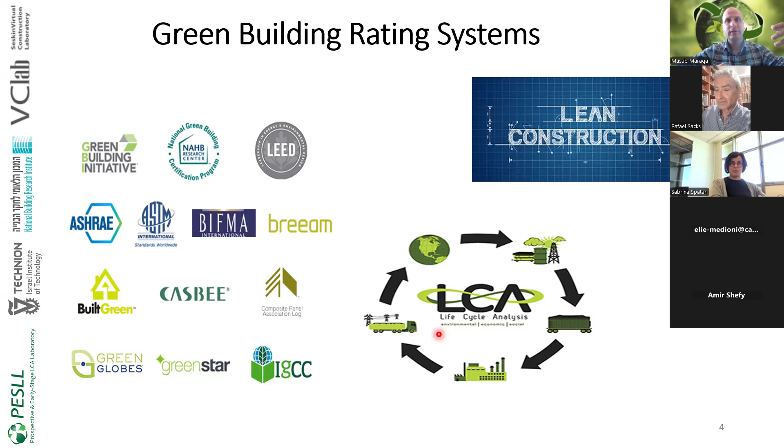For example, lean construction, which is defined as a way to design the production system to minimize waste of material, time, and effort, and maximize value, contributes to reducing different types of waste, but is not considered in improving the environmental performance of buildings.

So what is waste in construction? Waste is one of the central concepts that lean aims to eliminate. It represents any exhaustion of time, money, and resources that does not bring direct value to the customer.

Koskela defined or categorized three types of waste: waste related to transformation, or physical/material waste; waste related to flow, which is time loss; and waste related to value, which is value loss.

Material waste or material loss could be material waste, non-optimal use of material, or non-optimal use of machinery, energy, or labor, while time loss could occur in two things: in the product flow or in the work flow.

In the work flow, like unnecessary movement of people, unnecessary work, inefficient work, and waiting. While in the product flow, it could be space not being worked in, material not being processed, or unnecessary transportation of material.

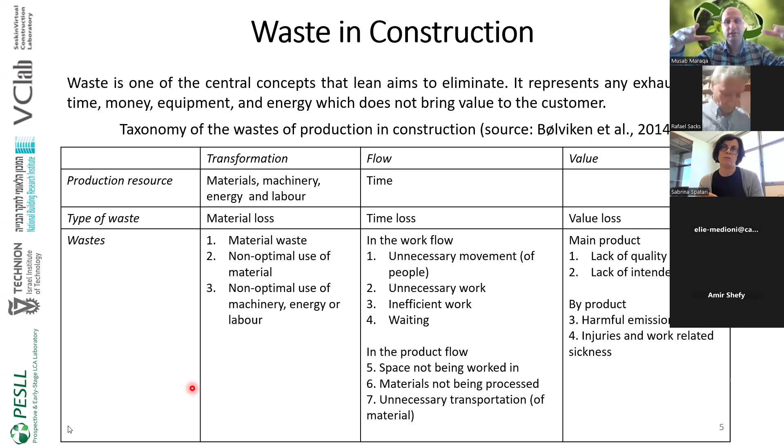Value waste can take two forms: in the main product and in the byproduct. In the main product, lack of quality or lack of intended use; while in the byproduct, harmful emissions, injuries, and work-related sickness.

In construction industry, production can be understood in three complementary ways: transformation performed by workers, equipment, tools; flow, which includes product flow and process flow; and value, which is the customer's ultimate goal. In the current state of construction industry, construction is associated with numerous types of waste.

Some of these wastes are tangible and visible, like material wastes delivered to the landfill. However, there are many hidden wastes represented by process waste and their associated operational waste.

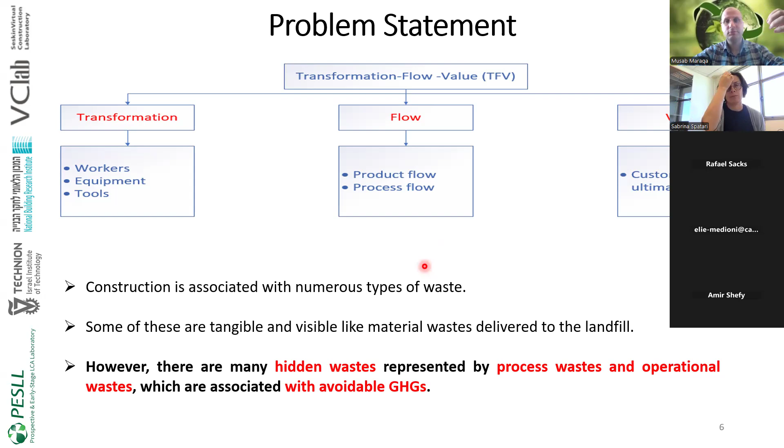Green building rating systems focus on improving the environmental performance of buildings, ideally on a life cycle basis relative to conventional buildings. They focus on materials used in construction, methods of planning, methods of recycling water, building efficiency in lighting, insulation, and acoustic performance. However, the approach is tailored to meeting end product requirements.

While these requirements are influenced by many construction processes and their associated operations, improving construction process can improve environmental performance since it will reduce the impact in both the final product and the whole supply chain process.

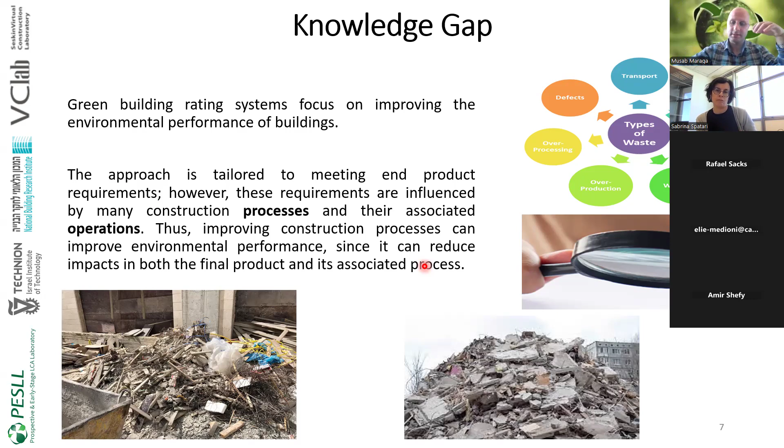So if we look at this figure, this is a flow line chart I created from real data from a construction project. The Y-axis represents the floors, while the X-axis represents the project duration. Those lines represent the different trades or work in the construction site, like the main structural system, the partitions, electrical.

So if one of us looks at this figure and needs to highlight the environmental impact for the construction industry, generally we look at the embodied greenhouse gas emissions in the material, like concrete, tile, or blocks, or embodied greenhouse gas emissions in the material waste resulted from the different activities.

While we generally don't look at the space waiting, for example after one contractor finished the work in a specific location and the successor starts. Or we don't look at the operational waiting, like after a subcontractor finished working in a specific location and waits until starting the next location. While these types of waiting, which is defined as waste, has its own embodied greenhouse gas emissions, which is ignored in the current state.

Musab, what is the unit of analysis on the x-axis? It's days. Yeah, okay.

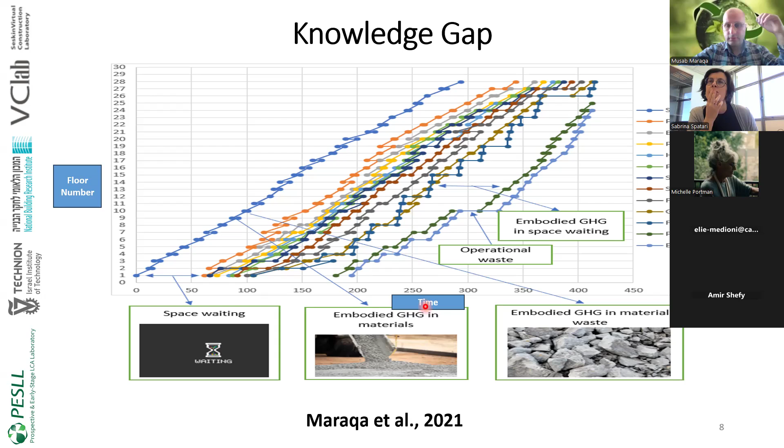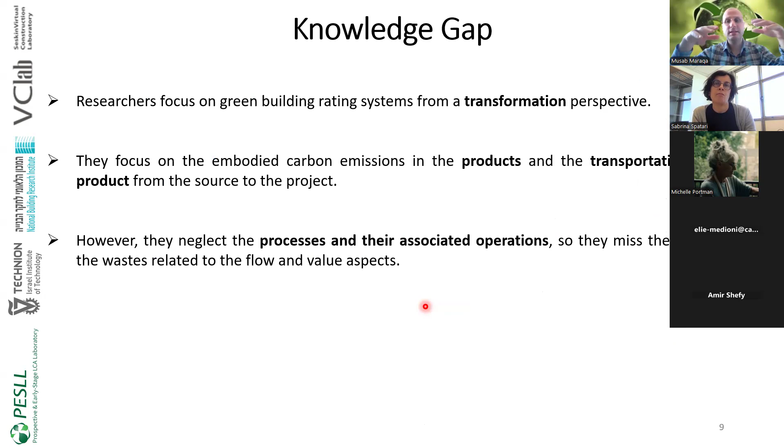So researchers focus on green building rating systems from a transformational perspective. They focus on the embodied carbon emissions in the product and the transportation of the product from the source to the project. However, they neglect the process and their associated operations, so they miss the impacts of wastes related to the flow and value aspects.

So this research generates many questions. The first one: are the current green building rating systems adequate? In what way are the current green building rating systems inadequate in terms of reducing environmental impact? What is the effect of applying a transformation view approach alone to achieve green buildings while ignoring flow and value views? What are the differences in emissions resulting from different flows in alternative operations?

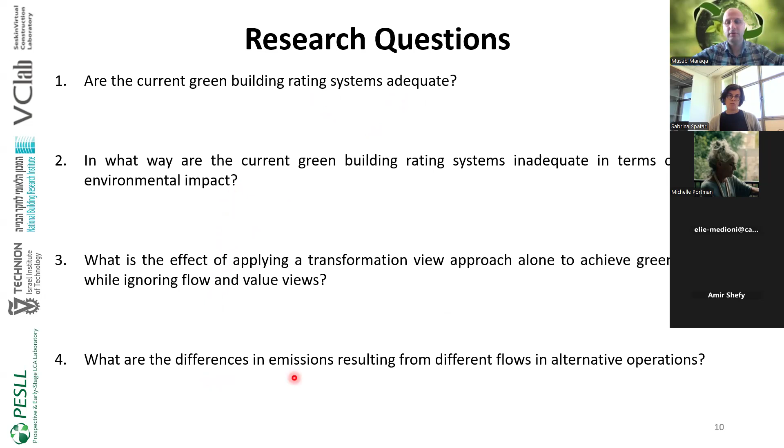What is the effect of project overrun or the effect of project duration from an environmental point of view? What are the best ways to overcome the gaps in the current green building rating systems and include the flow and value perspectives? What data are needed to complete a comprehensive environmental evaluation for the construction process, and how can we collect the required data?

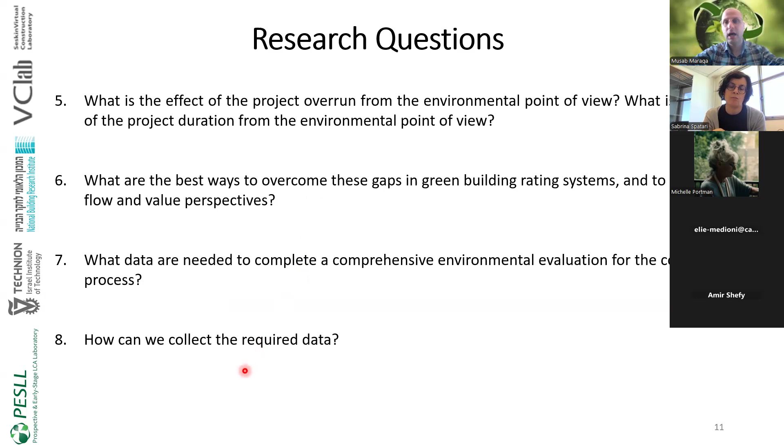So this research aims to explore the effects of the construction industry on reducing and improving greenhouse gas emissions during the construction phase, to develop a framework that measures embodied greenhouse gas emissions stemming from construction activity based on the transformation flow and value theory.

Introduce knowledge about the process effects of lean construction to optimize green buildings. Develop a method to measure the environmental effects of different construction production systems, and identify the effect of different management approaches in reducing product and process waste and improving the overall environmental performance for the construction industry.

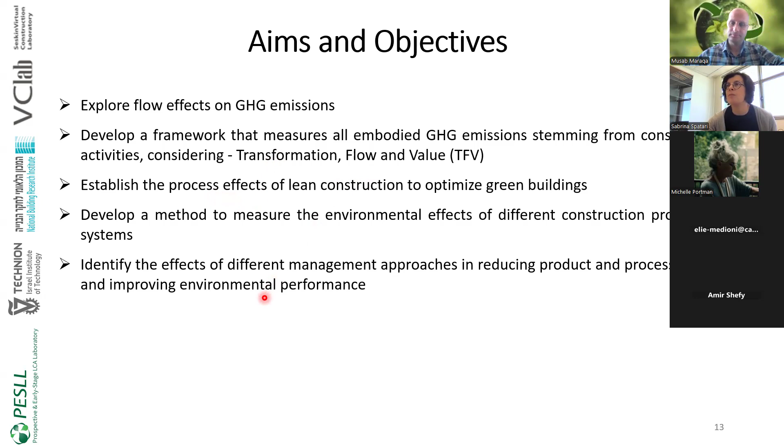So in this research, I used multiple research methods to answer the proposed questions. At the beginning, I conducted a systematic literature review, which covered 5 different subjects related to green building rating systems, waste in construction, lean construction, building information modeling, and life cycle assessment, in order to understand the interactions between these 5 disciplines and their importance in reducing greenhouse gas emissions, and to highlight what's missing in the current state.

In addition, I used several case studies, and I selected the case study research method because it's widely used in management science, and each case study has its unique features, so it can give us insight to understand the behavior of the construction industry.

In addition, I used life cycle assessment following ISO 14040 methods to calculate the reduction in greenhouse gas emissions, and analysis of data from a large construction dataset that applied a greenhouse gas emissions protocol. This helped us identify the effect of project duration on greenhouse gas emissions, and helped us develop a method and an index that can help any client capture greenhouse gas emissions during the construction phase.

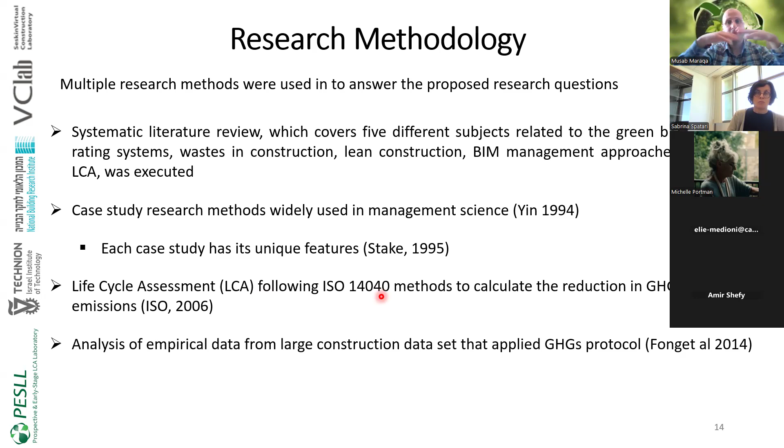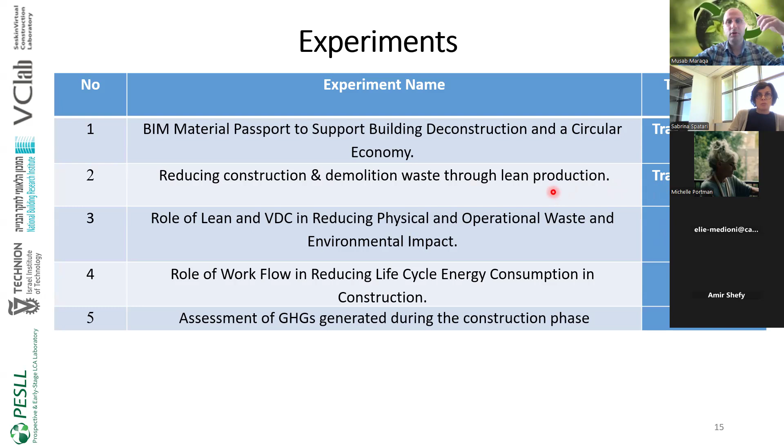So in this research, I mainly executed 5 experiments. The first 2 cover the transformational part, while the other 3 cover flow aspects. Now I will talk about these experiments in detail. In the first 2 experiments, which talk about transformation, in this lecture I will talk about experiment number 2, because the results were more visible to explore here and due to time limitation.

So let me start with experiment number 1: reducing construction and demolition waste through lean production. In this experiment, I tried to evaluate the reduction in construction waste due to implementing a centralized mixing station in a construction site, which is a concept called just-in-time delivery, one of the lean principles.

So in traditional management and conventional construction projects, generally each subcontractor makes his own material separately in different locations in the construction site, which leads at the end of the day to a lot of waste in the construction site and to surplus material that is wasted.

So the construction company that I studied in this research decided to make a centralized mixing station in the construction site, and not allow subcontractors to mix material on their own, but to mix it in a specific location.

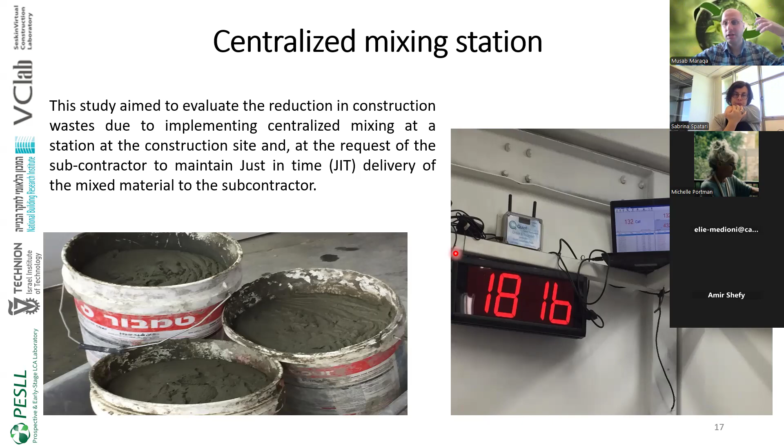Then the worker mix in this location can send the material to any location within the construction project using an elevator. So I went to the construction site and met with the people, with the project manager, the site engineers, and the subcontractors themselves to investigate the impact of centralized mixing station in reducing different types of waste.

The results showed that centralized mixing station resulted in eliminating the non-value adding activities, because the different subcontractors don't need to mix the material. The materials will reach them as a mix, so they will devote their time to value adding activities like buildings or tilings.

Second, the centralized mixing station keeps the construction site clean and in order, which plays an important role in reducing the amount of waste of different kinds of processes. They don't need to clean the construction site and deliver all this waste to a specific location and then send it to a landfill, because now things are more controlled in a specific location.

Improving the mix properties and characteristics: a worker mixing in a specific location for the whole construction site according to the ratios and codes will help in standardizing the work, which is a lean tool.

This also improves the mix quality by avoiding mixing different materials with different characteristics in the same location, supporting control and monitoring of materials, and one of the most important issues, eliminating material waste.

Generally, in the traditional way, when each subcontractor mixes, they will mix randomly, and at the end of the day there will be surplus material. Because the subcontractor is not paying money for them, they don't care if this material is wasted.

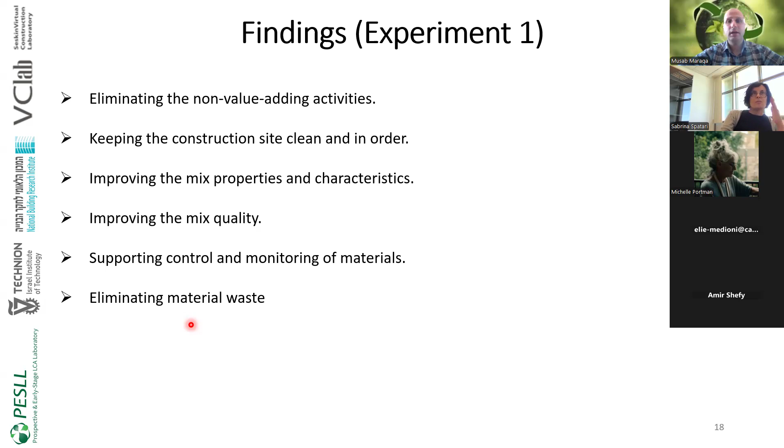The second experiment is entitled Role of Lean and VDC in Reducing Physical and Operational Waste and Improving Environmental Impact.

This experiment aims to answer the following questions: To what extent can Lean and VDC improve masonry block partition operations? Can they reduce the non-value adding activities? How can they reduce the operational waste? How can they reduce the physical waste? And what are the environmental impacts of these different types of waste?

I started this experiment during my master's degree, studying two construction companies. One used a traditional approach, while the other implemented lean construction using BIM, virtual design and construction. I extended the experiment during my PhD to include a new construction project with a different construction method to identify the effect of construction method on generating process waste.

In the traditional project studied in 2019, only one-third of workers' time activities were value-adding, and the rest were non-value-adding. When the company implemented lean construction and used virtual design and construction to optimize the number of blocks...

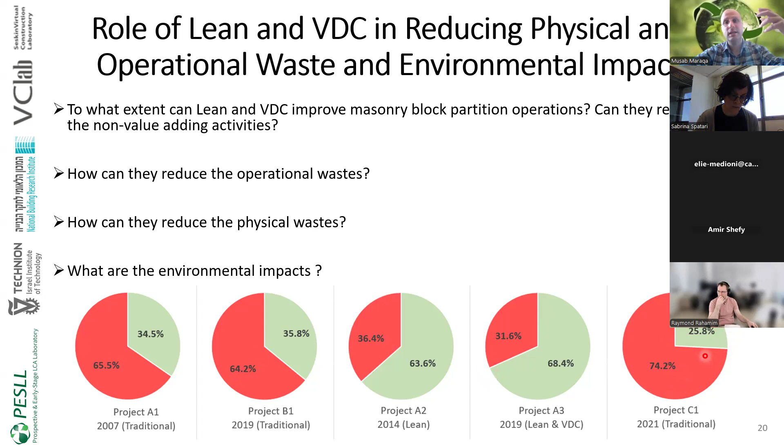The results were very eye-opening. It showed that only one-quarter of workers' time was value-adding activities, because they were spending their time on activities within the construction method itself, which is defined as waste from a lean point of view.

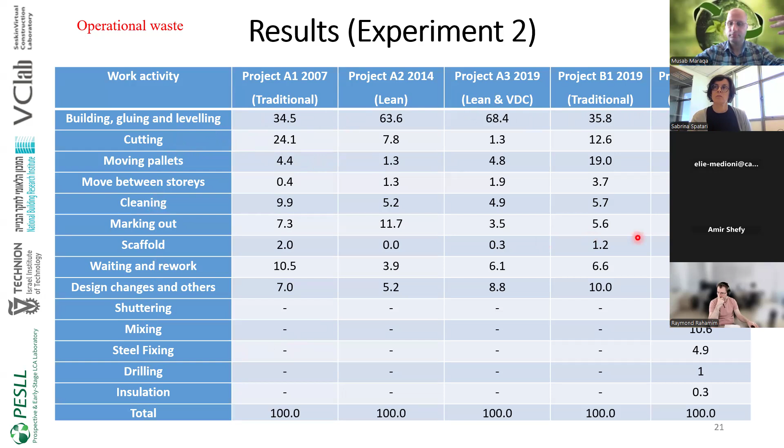After that, I studied the environmental impact for those three different types of blocks with their management approach. In the traditional project using AAC block, the global warming potential per partition area built is 25.6 kilogram CO2 equivalent per meter square, while in traditional project C1, using concrete block, the global warming potential is 58.4 kilogram CO2 equivalent per meter square.

On the other hand, in the Lean and VDC project, the amount is only 12 kilogram CO2 equivalent per meter square. This is due to two things: the embodied greenhouse gas emissions in the material itself, and the reduction in greenhouse gas emissions from material waste.

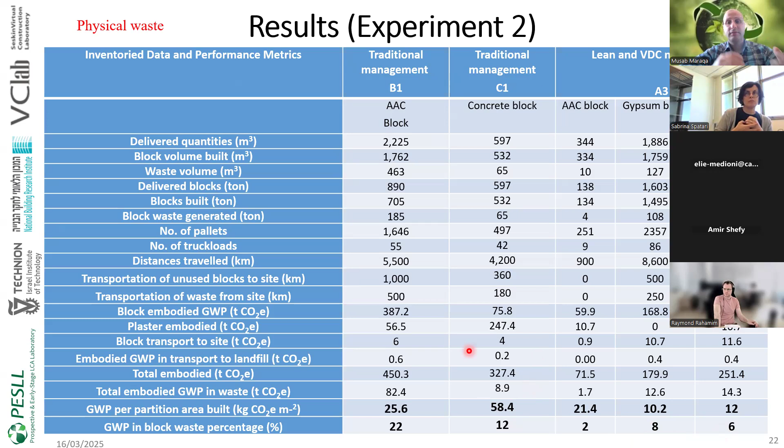If we look at the amount of waste percentage, it reduced to only 6% in the Lean and VDC project, compared to around 22% and 12% in the other traditional projects. This shows the importance of Lean in reducing both physical and operational waste and improving environmental performance.

The third experiment is to test the role of workflow in reducing life cycle energy consumption in construction.

This experiment aims to answer 5 questions. What is the effect of applying a transformation view approach alone to achieve green buildings while ignoring flow and value views? What is the effect of VDC and last planner system on improving the workflow? What is the effect of improving the construction workflow and reducing the project cycle time in cold climate areas? What is the effect of process and operations optimization in terms of increasing or reducing greenhouse gas emissions?

At the beginning, I created a framework to measure the environmental effects in the 3 dimensions. This framework shows where all the greenhouse gas emissions sources during the construction phase of the project come from. There are aspects related to transformation like material and material waste, which are already covered by completing an LCA model to capture all the greenhouse gas emissions in these sources.

Other environmental aspects related to waiting, inspection, rework, construction method, and weather conditions related to flow or not achieving the value, over design, and value delay - those things which have environmental impacts are missing in the current state, which are highlighted and covered by this framework.

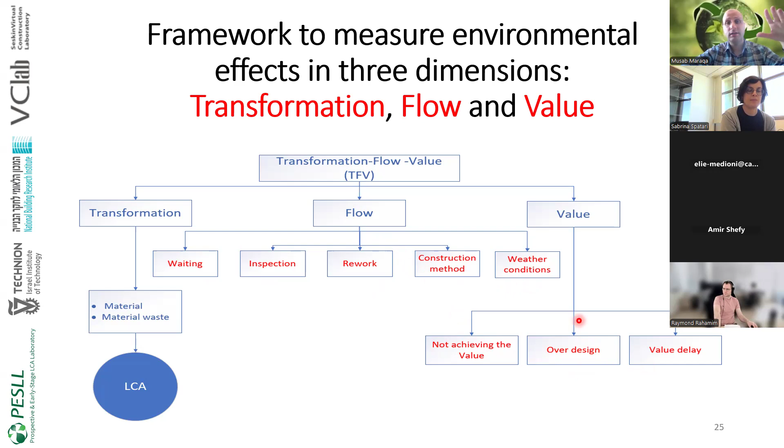In this research, I studied 2 construction projects, each consisting of 23 floors with 6 apartments. The 2 projects belong to the same construction company. One of them started construction in 2011 before the company started their lean and BIM journey, while the other one was constructed in 2018 using a lean and VDC management approach.

I collected all the related data from the control department in the company, collecting start and finish dates for each location, and created the line of balance charts. Then I modeled or simulated these 2 buildings in cold climate areas.

Maybe one can ask why I selected cold climate areas. I worked in 2016 in Kazakhstan, in Astana. What I saw over there was that during the winter time, the temperature declined significantly to 10, 20, and 30 degrees below zero. So you cannot work during the winter time unless you heat the construction site.

In that construction site, they closed the site with temporary materials like nylons and used a lot of heaters. These heaters operated 24 hours, for example before, after, and during casting the concrete, and not only for the concrete itself, but also for different finishing activities like HVAC, mechanical, electrical, even plastering, because if you don't heat, all these systems will crack.

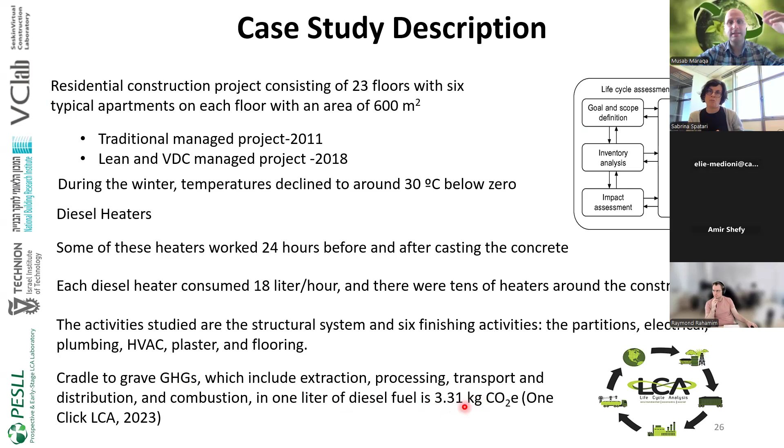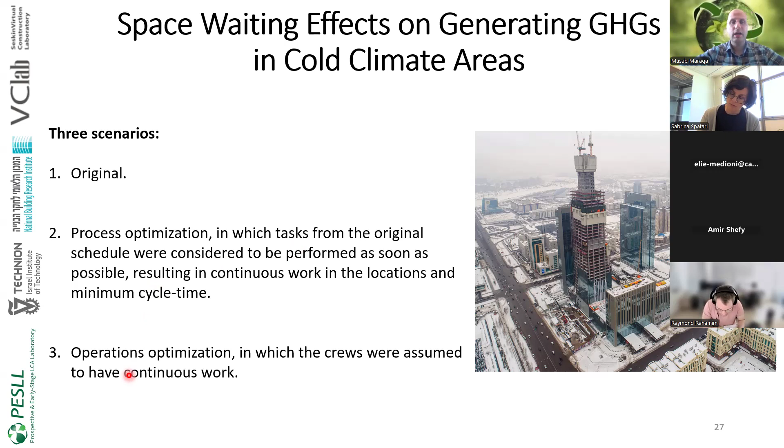To study the space waiting effects, I used 3 scenarios. The first is the original, based on data collected from the control department. The second is process optimization, in which tasks from the original schedule were performed as soon as possible to remove all waiting in location and reduce the project cycle time. The third is operations optimization, in which crews were assumed to have continuous work without considering the effect of space waiting.

This figure shows the line of balance for the lean and VDC project, the original one. The project duration is around 330 days, and we can see some waiting. But when we did the process optimization, assuming waiting would be 0 after finishing the first activity so the successor activity starts as soon as possible, this resulted in reducing the project cycle time by around 8 days.

When I assumed crew optimization to ensure continuity of work without considering the effect of location waiting, the project cycle time extended to around 430 days.

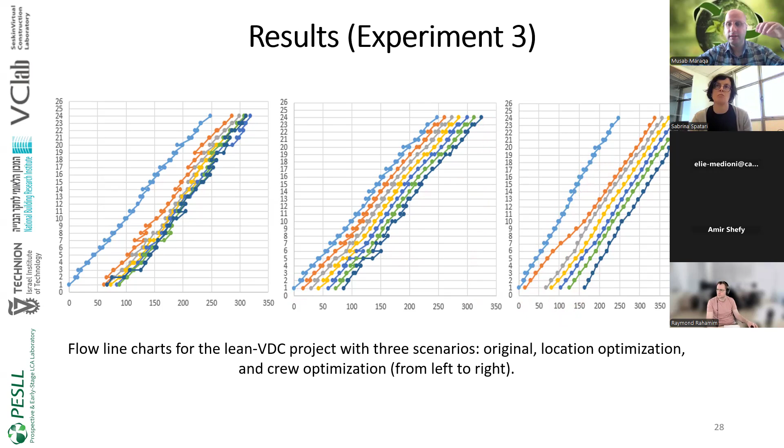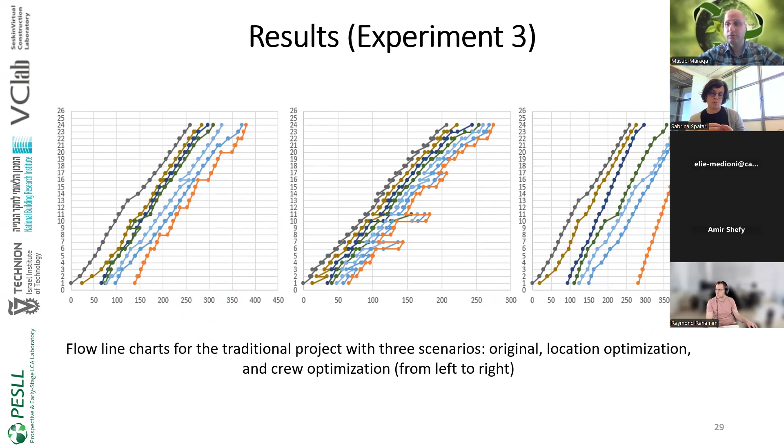In the traditional managed project, the original duration is around 380 days. With process optimization, the project duration reduced to around 280 days, while with crew optimization, it extended to around 430 days. This is for the overall project duration.

Looking in detail at each floor from floor 1 to 23, and the average cycle time per floor, we can see that the original scenario and the process optimization in the lean and VDC managed project approximately coincide, with an average of around 120 days.

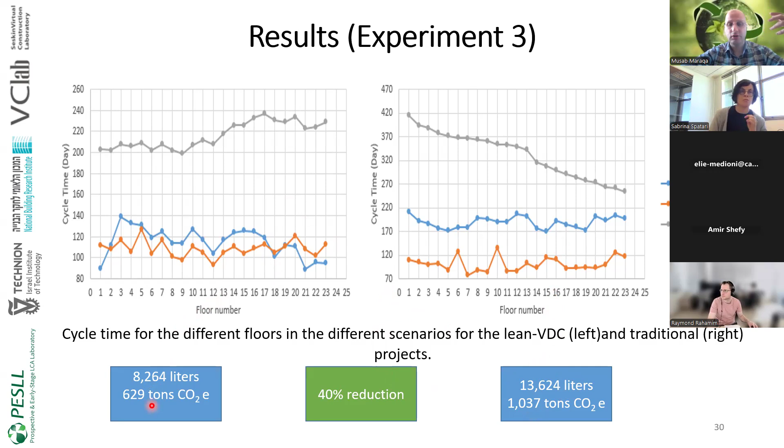While in the lean and VDC project, due to the reduction in project cycle time, the amount is 8,000 liters, which contributed to 629 tons of CO2 equivalent, a 40% reduction. This shows the importance of lean and VDC in reducing the project cycle time by around 40%, which contributed to reducing greenhouse gas emissions resulted from burning fuel and diesel.

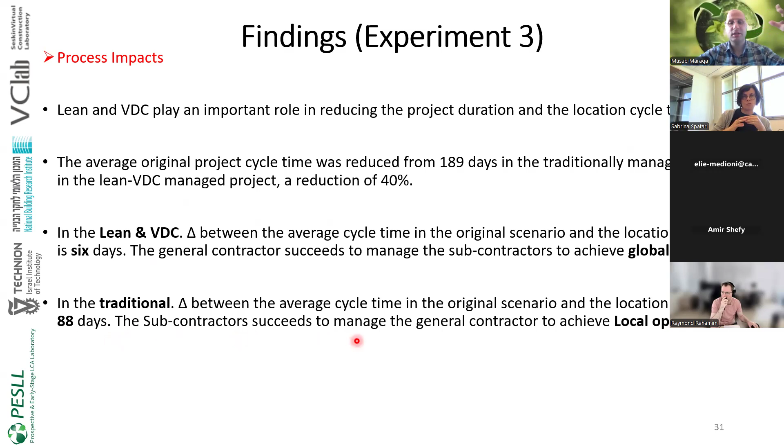Also, in the lean and VDC project, the delta between the original cycle time and the location optimization is 6 days, meaning the general contractor succeeded in managing the subcontractors and achieving global optimization, improving overall project performance. While in the traditional project, the delta between the average cycle time in the original scenario and the location optimization is 88 days, meaning the subcontractors succeeded in managing the general contractor and achieved only local optimization.

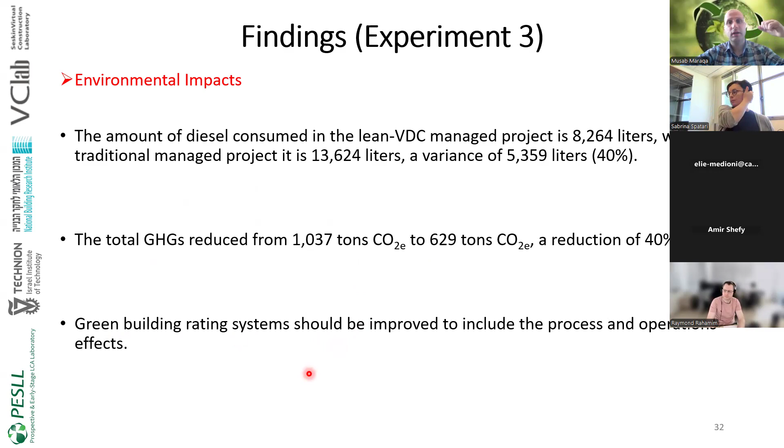Also, from environmental impacts, we can see there is a reduction by around 400 tons of CO2 equivalent between the two management approaches. This highlights the importance that green building rating systems should be improved to include the process and operational effects, which have their own greenhouse gas emissions not covered in the current state.

Now let me introduce experiment number 4, which is assessment of greenhouse gas emissions generated during the construction phase. This experiment aims to answer mainly 4 questions: What is the effect of the project overrun from an environmental point of view? What are the best ways to overcome the gaps in the current green building rating systems and include flow and value perspectives? What data are needed to complete a comprehensive environmental evaluation for the construction process? And how can we collect the required data?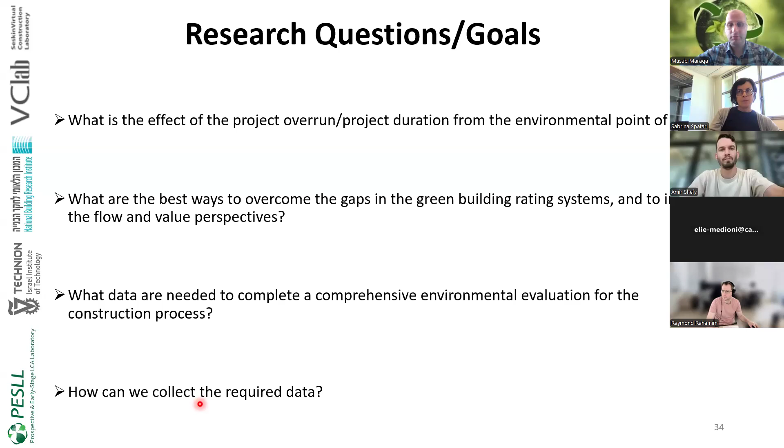So actually, in the green building rating system, there are 2 important categories: one called travel and transport, and the other called energy and atmosphere. They investigate the impact of these categories during the operational phase and set procedures and policies to reduce the greenhouse gas emissions generated during the operational phase. However, they do not take into consideration the construction phase, which involves a lot of workers and a lot of utility use.

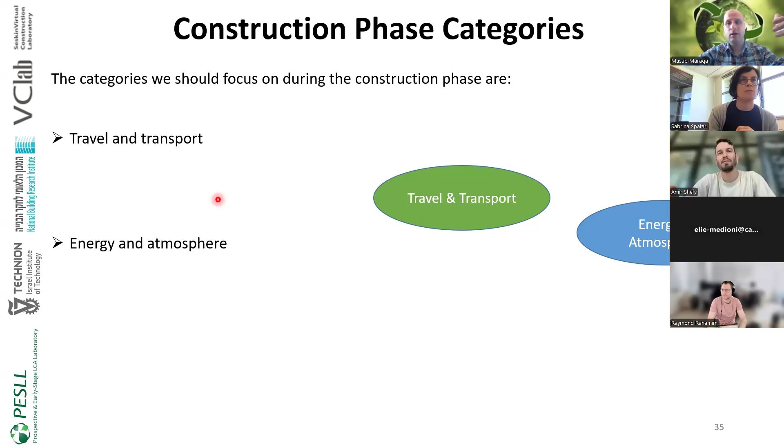So from a company called Construct CO2, I collected a data set. Construct CO2 is a consultant firm that collected data from hundreds of construction projects around the UK. I did an analysis of the empirical data that I collected from this company. This data includes management, operatives, visitors, material delivery, waste disposal, site fuel, and utility emissions.

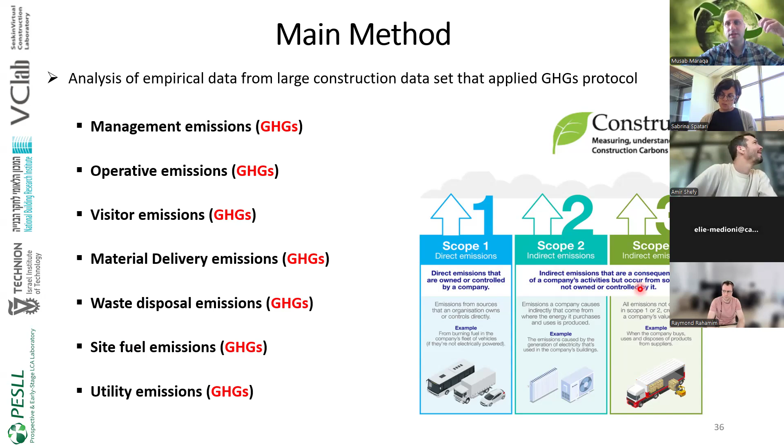Then these categories were also classified into scope 1, 2, and 3. Scope 1 emissions relate to direct emissions, meaning any kind of emissions generated and owned by the company or the general contractor. While scope 2 and scope 3 are indirect emissions, not controlled or owned by the general contractor. For example, scope 2 relates to electricity purchased from the company or government, while scope 3 is any kind of deliveries or emission sources generated by the subcontractors and not by the general contractor.

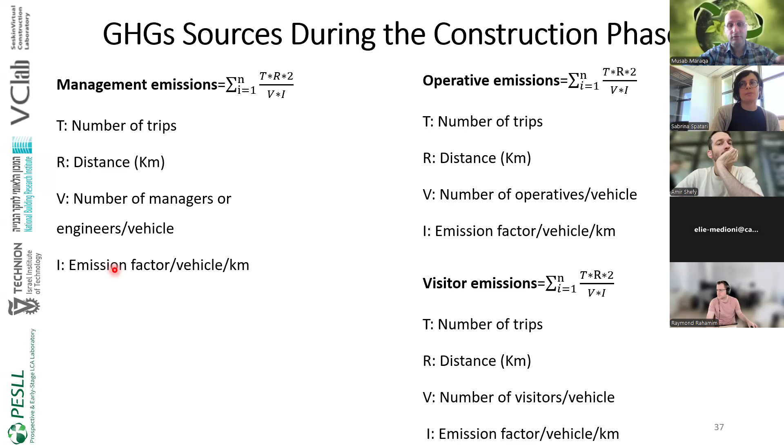Now, those are the equations used to calculate and capture the different kinds of greenhouse gas emissions. For example, looking at management emissions, to calculate the amount of greenhouse gas emissions generated daily at the construction site, you should capture the number of trips, distance traveled, number of managers or engineers coming by vehicle, and the emission factor per vehicle per kilometer. The same applies for operatives, visitors, and the different kinds of the 7 main parameters.

Then, from the data set I collected, and in order to highlight what's missing in the current green building rating system and to develop something that measures the effect of the construction phase, I developed an index called the green index. This green index consists mainly of 7 parameters, each with its own weighted average, calculated based on its importance. This index will help any company identify the effect of the project on the environment during the construction phase, and also give an indicator to compare the project with other previous projects.

So to calculate the indicator, for example P1 related to management emissions, the equation will be 1 minus the amount of greenhouse gas emissions generated for this construction project, over the maximum amount of greenhouse gas emissions generated for this category among the statistical sample collected for the construction project.

To calculate the weight for each of these parameters, the weight is calculated by dividing the maximum category emission by the summation of maximum values for each category. So this is an important point: the index will be dynamic and calibrated to be sufficient for any economy around the world, because it will depend on statistical data from that country or economy, and the weight will be calibrated accordingly based on the importance of the greenhouse gas emission sources.

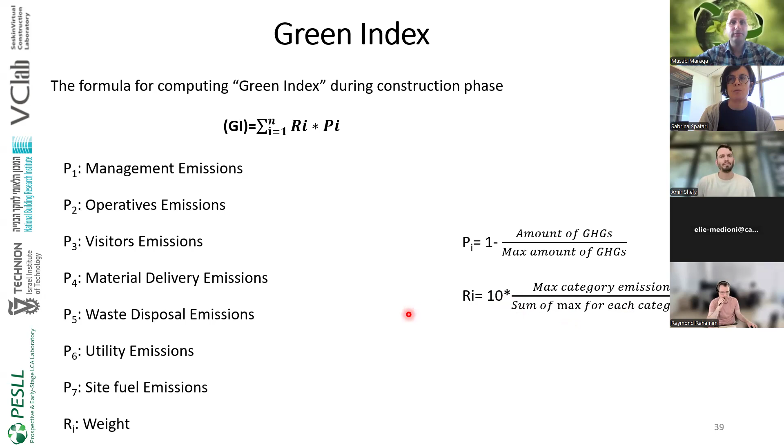After I developed the index, I applied it in three different construction projects to see how the index behaves. The green color shows the ideal values for the 7 parameters with the P total, while the blue color represents the actual P values. This line represents the average for all the projects.

What I mean by ideal value for P1, 0.45, or for P2, 3.7, is that if the project achieves 0 greenhouse gas emissions during the construction phase, it will get 0.45, or 3.7 for parameter P2. However, in this project, which is the best in our sample, it gets an overall 9, achieving 0.44 out of 0.45 in P1, or 3.1 out of 3.7 for P2.

If we look at the worst project, which has the highest amount of greenhouse gas emissions, it got a value of 0, because this project is the worst in our sample, and the overall score is 0.63.

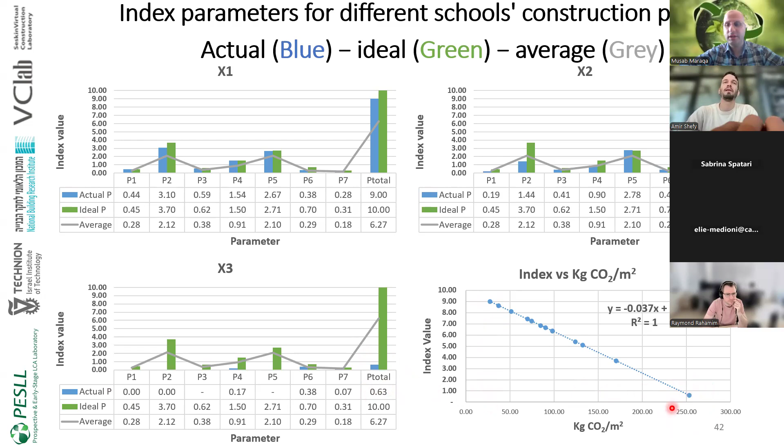If we look at the embodied emissions and compare the index value to the amount of CO2 equivalent per meter square, we can see that the first project, which got 9 out of 10, has greenhouse gas emissions of around 40 kilograms CO2 equivalent per meter square. While in the worst project, which got 0.63, the amount of greenhouse gas emissions generated is around 250 kilograms CO2 equivalent per meter square.

Now, from the data I collected, I developed some correlations to investigate the effect of project duration on the amount of greenhouse gas emissions generated. We can see that the longer the project duration, the more greenhouse gas emissions will be.

I classified these projects into three groups: the traditional project, the overall project, and the project managed using lean and VDC. We can see that the slope line in the lean and VDC project is lower than the conventional or traditional project, which means the sensitivity to project duration in the lean and VDC project is lower than in the traditional project. Although in both cases, the company should try to reduce project duration as much as possible to reduce the amount of greenhouse gas emissions generated.

I built the correlation between duration and the amount of kilogram CO2 equivalent per 1,000 pounds spent for scope 1, scope 2, operative emissions, delivery, and scope 3. We can see in some curves there is some scattering in the data and high standard deviation. There are a lot of explanations for this.

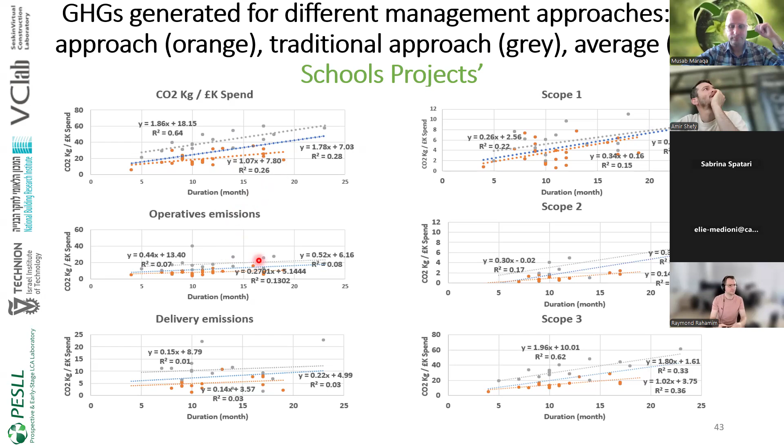Other things related to the data I collected: I tried to build a correlation to identify the percentage of greenhouse gas emissions related to the 7 categories. In my data set, I found that around 50% of greenhouse gas emissions relate to operative emissions. Maybe this is suitable in the UK, or in our country, or in moderate climate areas.

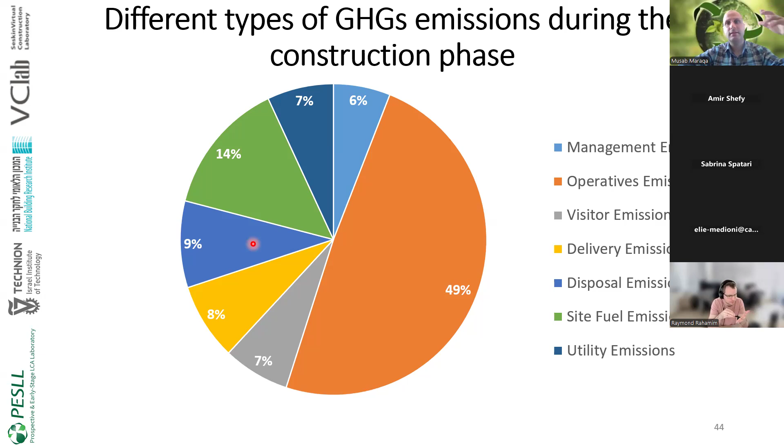But for example, if you go to cold climate areas, as I showed previously in Kazakhstan, in Astana, heating requires a tremendous amount of diesel to heat the construction project. Unfortunately I did not have the opportunity to collect holistic data from these cold climate areas and build the correlation, but the methodology is ready. Over there, I suppose site fuel emissions will be the dominant factor. For this reason, when I created the green index, I said it would be suitable for any economy around the world, because it will be calibrated based on data from that economy, which gives a more realistic result than a green building rating system designed only for one country.

As a finding from this experiment, we can see that the longer the project duration, the more environmental hazards impact. This highlights the importance of optimizing the project duration and reducing the project cycle time to minimize environmental impact. This helps construction companies and decision makers take strategic decisions to reduce greenhouse gas emissions.

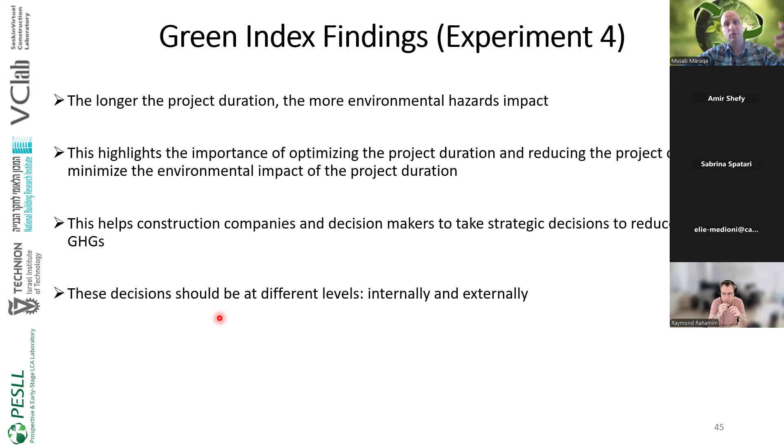These decisions could be at two different levels, internally and externally. Internally, by using different management approaches, using construction technology to improve worker activities, to reduce project cycle time, or to use renewable energy sources. Externally, the same things, by contracting with subcontractors who apply different management approaches or use renewable energy sources.

Also, as a conclusion for the green index that I developed, the green index is a vital and live tool to benchmark and present the construction project's environmental impact. It measures the project's environmental effectiveness at any time instance. It helps the project manager or any third party to monitor the project performance and take decisions to mitigate hazards.

One of the most important characteristics is that it shows the total value for the green index and for each parameter individually, which helps decision makers identify the critical parameters that reflect and cause the highest environmental effect, and to invest and take better decisions to reduce the greenhouse gas emissions related to these parameters.

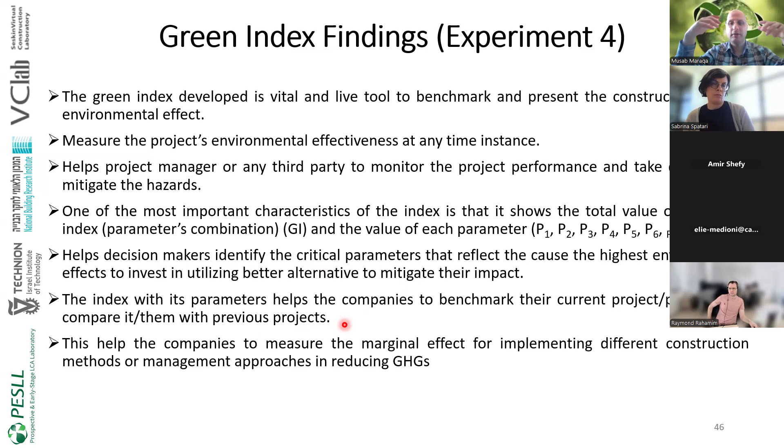The index with its parameters helps companies benchmark the current project and compare it with other previous projects. This in turn will help companies measure the marginal impact of implementing different construction management methods in reducing greenhouse gas emissions. So at the end, as a conclusion for this research, based on the questions I generated...

When I asked whether the current green building systems are adequate, simply no. The current green building rating system is insufficient for achieving truly green buildings, because they are not covering the construction phase in terms of process and their associated operation.

So in what way are the current green building rating systems inadequate? People look at the transformational part, ignoring the process and associated operation. They measure greenhouse gas emissions only on the product and ignore the process. So they are missing flow aspects and missing value aspects.

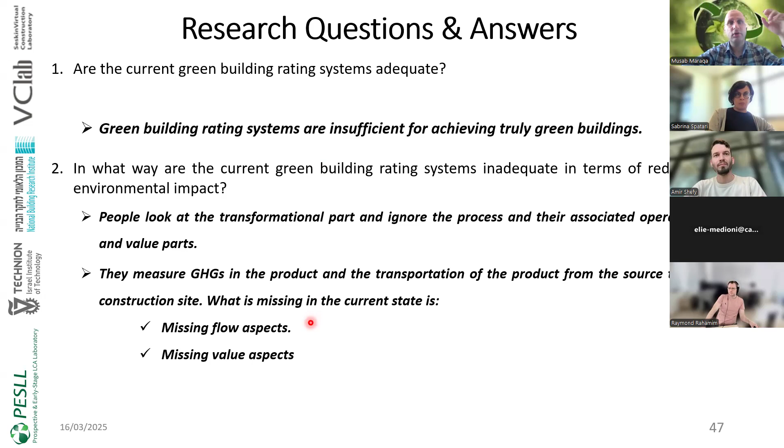What is the effect of applying a transformation view approach alone to achieve green buildings while ignoring flow and value? It only considers the embodied greenhouse gas emissions in the product, but not emissions from equipment and tools, site overhead, different kinds of utility emissions, durations, and oil and gas used during the construction phase.

What is the effect of project overrun from an environmental point of view? As we saw in the last experiment, the longer the project duration, the more greenhouse gas emissions will be generated.

What are the best ways to overcome the gaps in the green building rating system and to include flow and value? To do that, flow and value perspectives should be included and integrated comprehensively within any green building rating system.

The data needed to complete a comprehensive environmental evaluation for the construction process is anything that generates greenhouse gas emissions during the construction phase, like management, workers, material delivery, waste delivery, site fuel, and utility emissions.

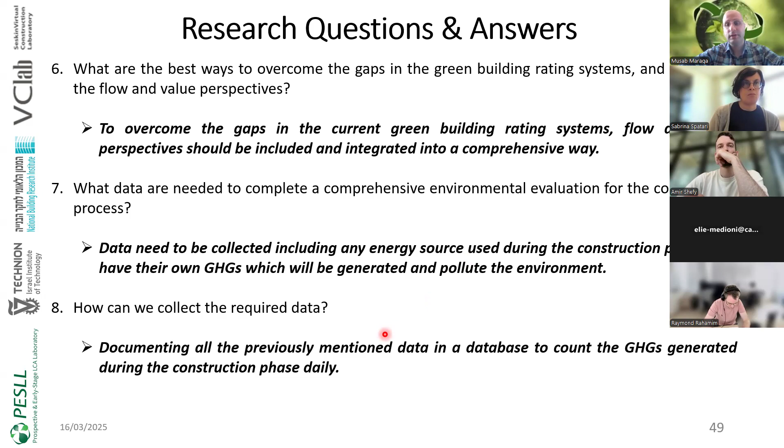So the contribution of this research is a new framework and method for evaluating greenhouse gas emissions during the construction phase. It introduces knowledge about the process effects of lean construction to operationalize cost-effective green construction methods and optimize green buildings as a product. A method showing how lean can optimize and improve green building is expected to have significant impact on both construction management and environmental decision-making fields, and encourage more research in these disciplines.

It demonstrates a practical tool for any client, third party, or contractor to estimate environmental impacts. It will motivate governments, clients, and decision makers to apply this method by demonstrating its importance and benefit, and the proposed method will enable green building at lower cost relative to conventional buildings.

At the end, I should acknowledge the Ministry of Construction and Housing, Technion Graduate School, and Technion Sustainability Frontier for funding this research. And I will also thank Professor Sabrina Spatari and Professor Rafael Sacks for supervising and guiding me during my master's and PhD. Thanks very much for your listening and attendance.